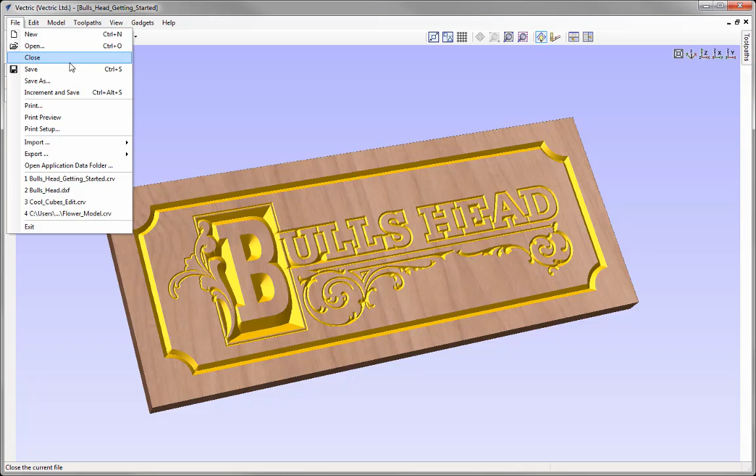So let's go to File, Close, and open an existing file. We can do that using this option here, and if I click on that, we're able to browse our system to locate files that we may want to bring in. In this case, we're looking at the Bull's Head project folder, and we're going to open the Bulls_Head.dxf file, and then press open.

So what we have here is a vector file that was created in another drawing program. Now the software automatically sets the size of the job to the size of the largest object within that imported file. We're going to look at making this part bigger just to ensure that we have space around the actual part to cut around the job and space to hold the part down also.

So to edit the size of our job, we simply come over to the job setup form, which is automatically opened up on the left hand side. So we are working with a single-sided job here. Now the job size, I'd like to alter that, so we're going to look at altering the width to begin with. We'll make that 12 inches wide, and we'll make the height of this 5 inches high. And you'll notice it's added height to the top, and it's added the width to the right hand side.

And that's all down to the actual XY datum position. We can see it's currently set to the lower left here, and we'll come back to this in a minute.

Then we need to specify material thickness, so 1/2 inch is what I plan to work with. The units that we're going to work with in this case is inches, so we'll keep that selected there.

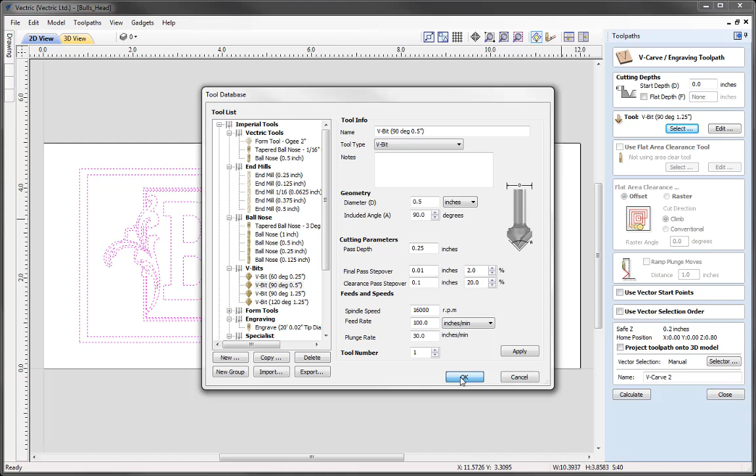I can just check over the settings, ensuring they're safe and appropriate for what I'm doing. And I could go ahead and press OK, and you'll see that our tool has now changed, and it's changed to the tool that we selected from that tool database.

So moving down the form, we've got various options that are greyed out, and that's because we haven't got the flat depth option selected there. So working our way down the form, we're going to give our toolpath a name. So we're just going to call this one VCarve, and then we'll just call that one 90, just for our own reference, and that we're using a 90-degree V-bit tool.

And we could simply just go ahead and press calculate. Okay, so it's calculated that extremely quickly there. And what it's done is it's automatically opened up the preview toolpath form on the right hand side, and it automatically puts me in the 3D view.

And this is where I can see the toolpath represented by the blue lines, and I could look at simulating the toolpath being cut in this virtual block of material that we've got here. So this toolpath has been drawn for us in the 3D view, and this literally represents the coordinates the software is going to tell the tool to move to in order to carve out the sign.

And this is very useful for me to see the actual paths displayed here, but it's more useful for me to visualize the actual cutout simulation, and that's what this preview toolpath function is for.

So starting at the top, we have the option to specify the actual material that we preview this in. And if I just click on Beech Dark, you'll see it displayed with a list of all kinds of woods that we've got loaded into the software, metals, stones, and various miscellaneous plastics that we've got here. You also have the option to use a solid colour, and if you wanted to, you could use your own bitmap by adding that into the actual folder itself.

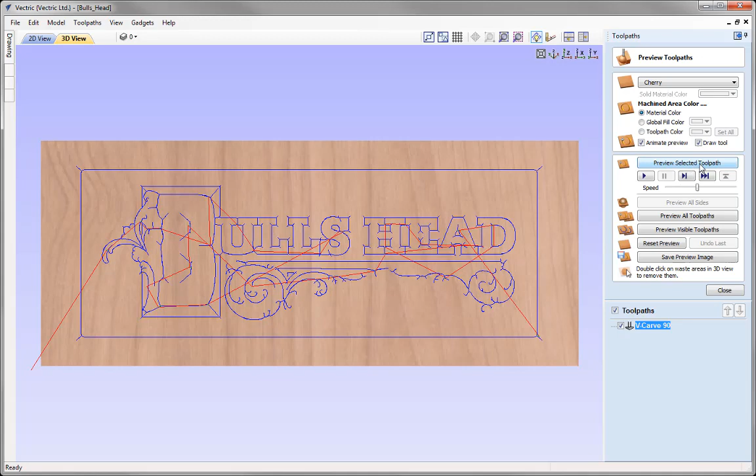And so we can see that tool, you can see it's just working its way around the part. If I wanted to, I could go ahead and just speed up that simulation, and you can see there it's finished simulating that part, and we can see exactly how this part is going to look if we was to cut that out using the settings we had in our toolpath on our CNC machine.

And so we can see the exact shape that we're going to get on our CNC machine. This is very important. If I think this looks right at this stage, I can go away with confidence, save out the toolpath, and know it should look like this if I set everything correctly on my CNC. Now if something doesn't look right at this stage, I have the option to fix it before wasting any time or material cutting this part, and that's why it's vital to check over the actual toolpath preview.

Now going back to the actual colours we can add to our part, we can look at adding a contrasting colour if I wanted to. So what I could do is use this global fill colour option, and you'll see we currently have yellow selected there, and I'll just fill all the areas that we've cut away in this yellow colour. This gives the effect as if our part was gilded. It's a really nice way for us to get a good representation of the part we're going to get, even when we come to finishing the part by painting it up, for instance.

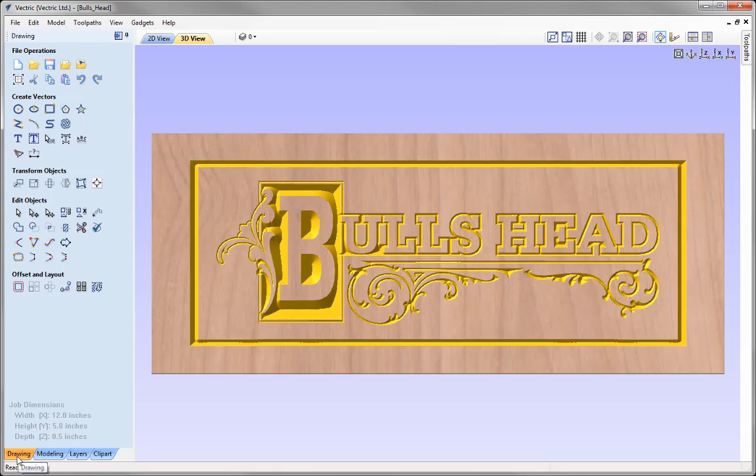I'm going to come up to this icon here where we're going to switch back over to the design commands. If I click on that, it's going to close my Toolpaths tab and open up the design tabs. You can see that we're currently in the drawing tab there, so let's go into the 2D view. So here are our vectors.

Now what I'd like to do is remove the inner border vector that we've got. I'm just going to click into the white space to deselect all of those vectors in that selection. Then I'm going to click on the vector that represents the inner border, and this is the vector that I'd like to remove. With that selected, I'm simply going to press the delete key on the keyboard, and that's going to delete that for me.

So now we're going to select this vector here that represents the border. We've got a rectangle vector. With that selected, let's go into the Draw Rectangle tool to edit the shape of this rectangle.

So at the moment I can see the current width and the height. I'd like to round this up, and before I change that I just want to make sure that my anchor point is set to the centre of the rectangle, so that when we alter the size it sets that about the actual centre of the rectangle. So here we're going to give that a width of 11 and a height of 4 inches, and then we could just simply go ahead and press apply and we'll see that that's been updated there.

If I wanted to, I could give the rectangle shape a little bit more of an interesting shape by altering the corner type. For example, I could give this radius external corner, give that a radius of 1/2 inch, press apply there. You'll see we've got rounded corners for our sign.

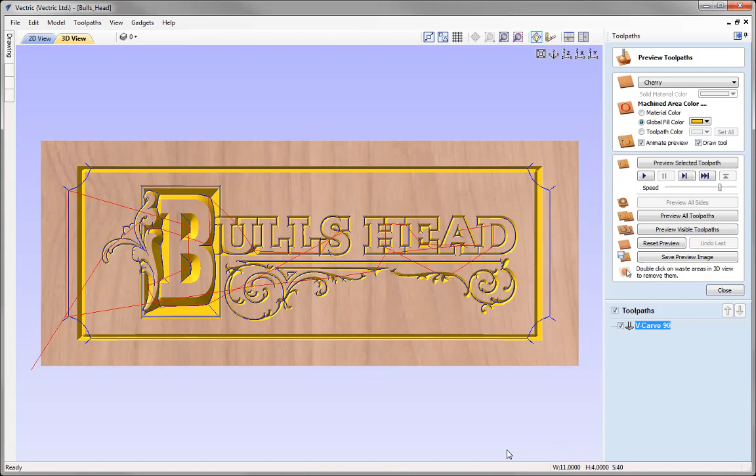And so there we can just use the option to calculate that. It's going to calculate it. You can reset this preview by using this button here, so we can see the toolpath there. Put it in the ISO view, and then we'll just go ahead and preview that toolpath and put the speed up to the max there.

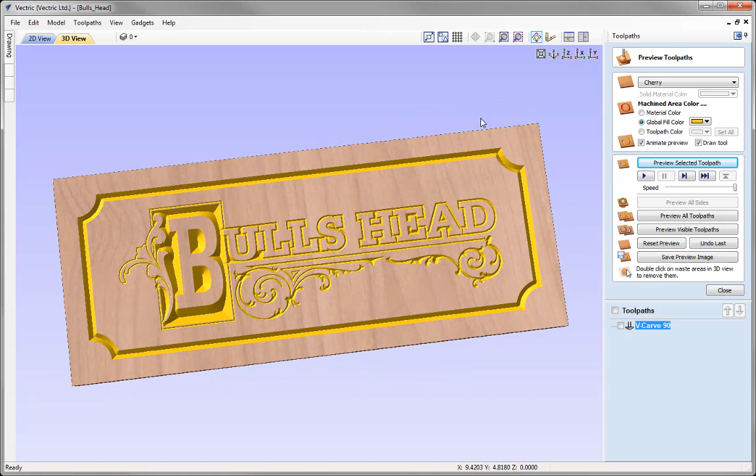So there we have our newly created border. We can see how that looks, and I think it looks a lot better than the simple rectangle that we had previously. Now looking at the actual bull's head text, just by visually taking into account where it's positioned, it looks as though it's more over to the right hand side.

Now we know that this text is in the centre of our job, and it's probably something to do with the actual flourish shape that we've got next to the letter B here. So even though the part is mathematically in the centre, sometimes that doesn't always mean it's going to look correct visually, so we just need to look at doing some manual editing, tweaking and positioning of where this text actually sits.

So to do that, let's just close out of the preview toolpath. We're just going to switch back over to the design tab and go straight into the 2D view. Now I only want to look at moving the vectors that represent the bull's head text, so I don't want to move the border vectors. To deselect those, I'm just going to hold down Shift and select them one at a time, and you'll see that we've now deselected them.

So with the text selected, we could look at moving that over into a position that looks more central compared to the border itself. With the vector selected, one way of doing this is we could come over to transform objects and look at moving the selected objects.

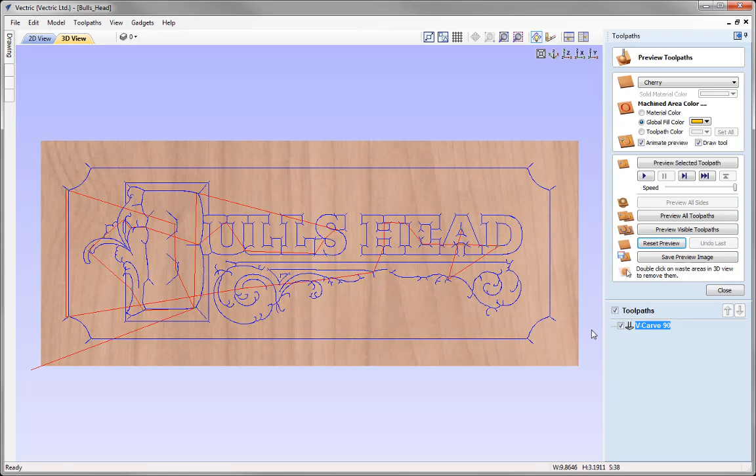Again, let's go ahead and reset that preview, and then we could just preview that toolpath. And there I can see it looks a lot better. I'm happy with the change that we made there. It's very important that your part looks correct at this stage.

As you've seen, we've made several iterations to this part, previewing those changes until we like the look of the preview. The toolpath preview shows you an accurate representation of what we would see on our CNC machine if we was to go ahead, save out these toolpaths and run them on our machine.

So if something doesn't look as you wanted it at this stage, you can, as you've seen in this example, go back and make edits to the vectors or toolpaths and recalculate them until you are satisfied with the results you see in the toolpath preview. And that's what makes the toolpath preview such a powerful tool.

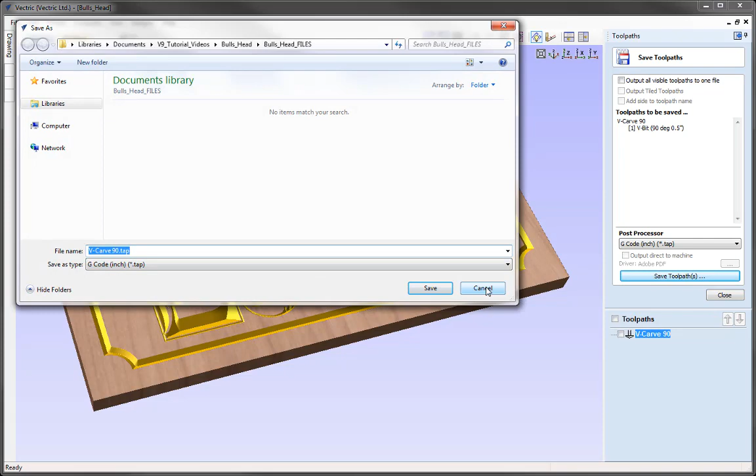So at this stage we'd go ahead and close that preview toolpath, save the toolpath out, and then go ahead and save that out to our machine, and then we could simply cut that file. Now I'm not going to save that in this case, but what I am going to do is save the actual file so that we have it to come back to if we wanted to make changes in the future.

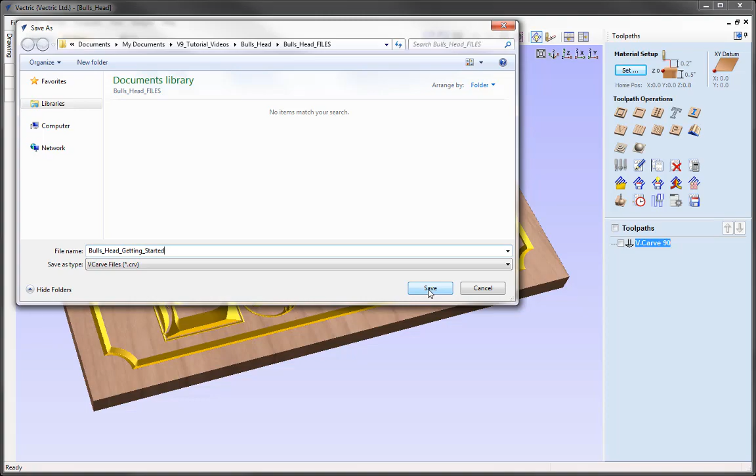To do that, let's go to File, Save As, and we're going to call this one Bull's Head Getting Started, and we'll save that, and you can access that from the project folder.